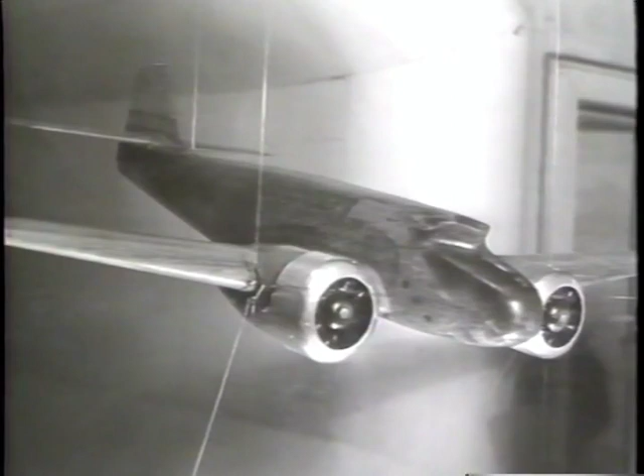In 1932, a small group led by Robert E. Gross had purchased Lockheed out of bankruptcy for $40,000 and staked the company's future on the development of an all-metal, twin-engine transport. Models of the design were sent to the University of Michigan, where a young graduate student named Clarence L. Johnson conducted wind tunnel tests.

Although his faculty advisors gave the design a passing grade, he wasn't much impressed, and after he had been hired on as a tool designer at Lockheed in August of 1933, he let Chief Design Engineer Hall Hibbard know about it. Among other things, it'd be directionally unstable, especially with one engine out. A rather presumptuous and certainly unconventional way for a 23-year-old to start his career with a new company, but it was only a hint of what would follow.

The son of Swedish immigrants, he'd been nicknamed Kelly by classmates because of his quick temper, stubborn tenacity, and unwillingness to back down from a fight, even against overwhelming odds. Instead of reminding the outspoken young man of his place, Hibbard suggested he go back to the wind tunnel and see if he could improve the design.

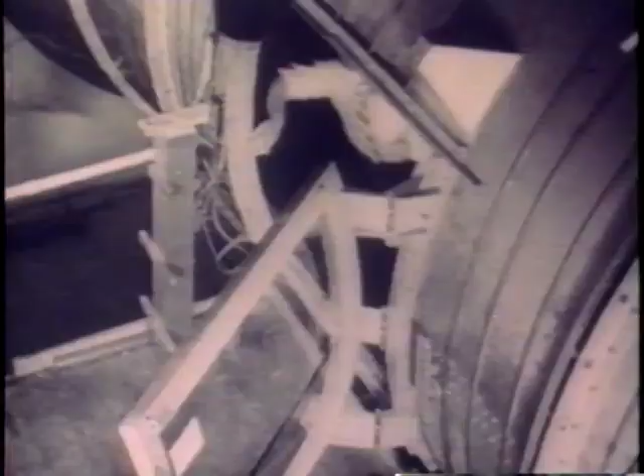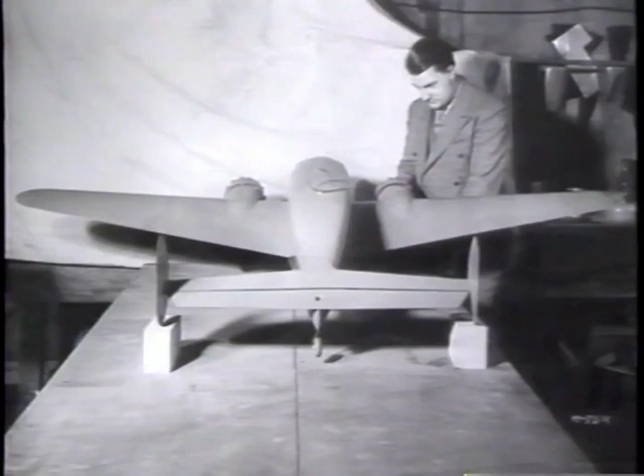After 72 test runs, he came up with the solution, an unconventional twin-tail arrangement soon to become a Lockheed trademark. And the Model 10 Electra became the foundation for Lockheed's future growth as various models of the airplane helped revolutionize commercial air transport in the 1930s.

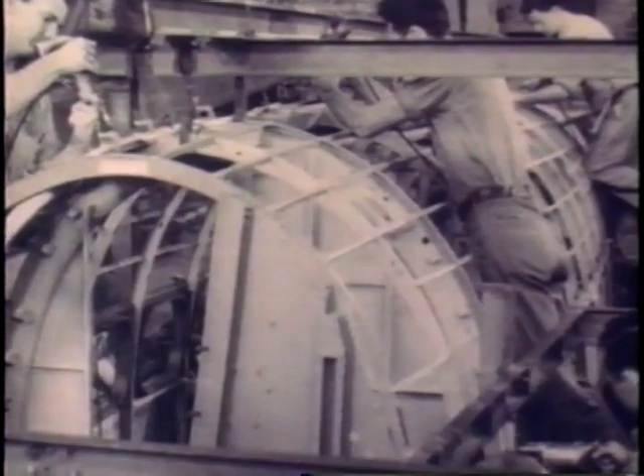With his work on the design, Kelly Johnson became the 6th member of an engineering department in an industry which then couldn't afford specialists. Working often simultaneously as an aerodynamicist, stress analyst, weight, wind tunnel, and flight test engineer, he also put in long hours out in the shop, getting hands-on production experience and learning firsthand the importance of designing producibility into an airplane. It was a real-world education on all phases of design and development that within a decade couldn't be duplicated, and the lessons learned became guideposts for the rest of his career.

He flew, for example, as flight test engineer on all models of the Electra and worked for some of the most notable figures in aviation, such as Amelia Earhart. Out of this experience came his lifelong conviction that the designer had to be able to test his own airplane. As he later commented, 'I decided at an early age that unless I had hell scared out of me once a year, I wouldn't have the proper balance to really design new airplanes of any type.'

Kelly Johnson would log more than 2,300 hours as a flight test engineer. The versatile Electra spawned 2 major developments.

One was the XC-35, a modified Model 10, which in 1937 first demonstrated the practical feasibility of transforming the entire fuselage into a pressurized cabin to permit comfortable high-altitude flight. Johnson was Lockheed's flight test engineer on this project, gaining first-hand experience with the problems of pressurization, and more important, with the tremendous possibilities pioneered by this aircraft. Possibilities to which he and Hall Hibbard began to give serious consideration.

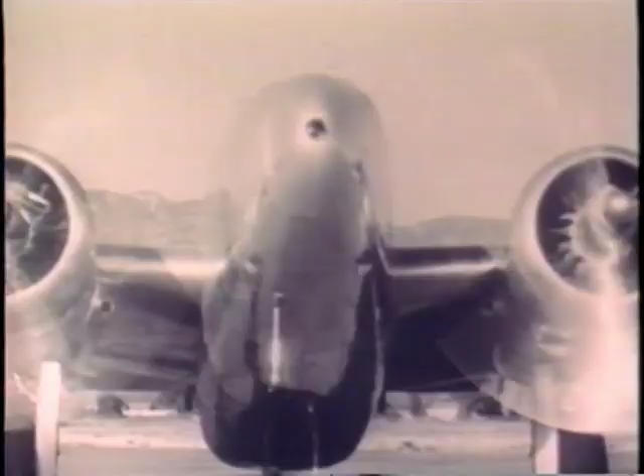Meanwhile, the Model 14 Electra incorporated a number of Johnson innovations, such as the first practical application of Fowler flaps, which both increased the wing's lifting surface and served to permit slower, shorter distance landings, an achievement which won him the 1937 Lawrence Sperry Award.

In 1938, the high speed and innovative features of the Model 14 attracted British interest in its potential as an anti-submarine patrol plane. But the requirements necessitated a major redesign. Johnson worked around the clock for 3 days, and transformed the Model 14 into the Hudson bomber.

The British ordered an initial batch of 250 aircraft, at that time the largest production order ever received by an American company. But there would be many more, 2,000 to the RAF alone, out of a total production run of nearly 3,000 airplanes. The Hudson put Lockheed into the big time.

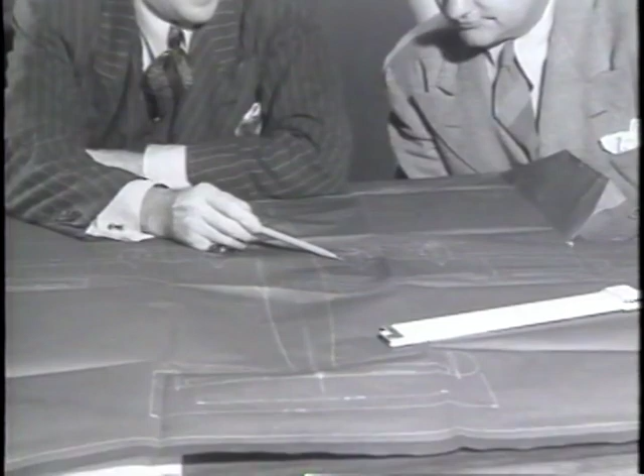But even as production was gearing up, Kelly Johnson and his colleagues were well into other much more ambitious designs. The success of the pressurized XC-35 and the recognition that the next generation of air transports would be much larger, higher-speed, transoceanic aircraft inspired Johnson, Hibbard, and a small design team to lay out the now classic lines of the Model 49 Constellation in 1939.

Using his soon-to-be legendary powers of persuasion, he convinced Lockheed to build its own wind tunnel, a decision that paid for itself many times over during the development of this design, as all aerodynamic problems were overcome early on and not one external change had to be made to the actual aircraft. Hibbard was so impressed by Johnson's wizardry that he swore he could see air.

Commercial development of the legendary Connie would be delayed by the war, and it first flew as the Army Air Force's C-69. This, however, provided time to refine the airplane so that at war's end, Lockheed was postured to capture a lion's share of the commercial market, and various models of the elegant Connie would continue to grace the world's airways into the late 1950s.

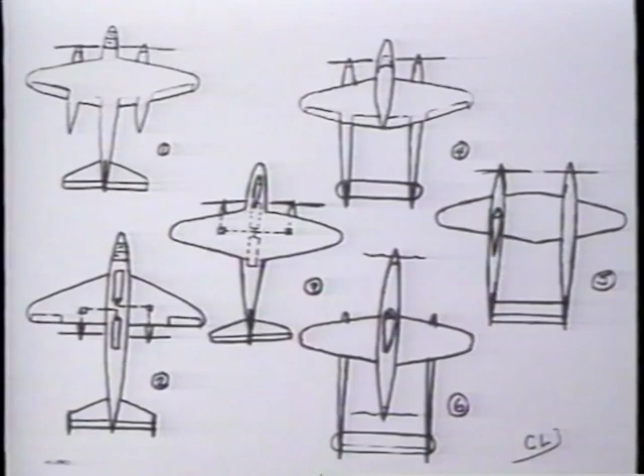At the time he laid down the basic design of the Constellation, Johnson was already well into another path-breaking project. In early 1937, responding to an Air Corps requirement for a high-altitude interceptor capable of 360 miles per hour, Johnson and Hibbard hastily conceived some possible configurations, depicted here in one of Kelly's rough sketches. As Johnson observed many times, in design, you're forced to develop unusual solutions to unusual problems.

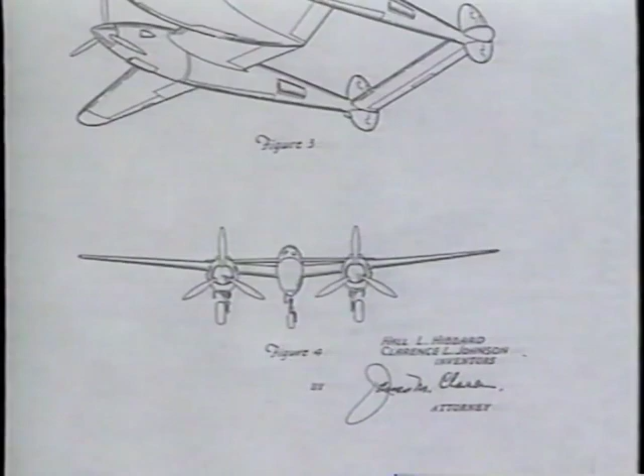Their decision to go with an unconventional twin-boom configuration was dictated by another axiom: design features are the creatures of necessity. The twin booms evolved as a logical development of engine nacelles which had to be extended to house the liquid-cooled engines, turbo superchargers, radiators, and main landing gear. It seemed logical then to simply extend the nacelles into booms which could carry the empennage. Their novel approach produced a winning design, and when the XP-38 was finally rolled out in January of 1939, its sleek lines bespoke speed.

And when Lieutenant Ben Kelsey took it up for its maiden flight, it delivered an impressive 403 miles per hour, far exceeding the requirements. Thus began the saga of the P-38 Lightning.

The first American aircraft able to fly at such speeds, it offered dazzling performance and a host of new problems. For as it peeled over into dives at high altitudes, it could hit speeds approaching 500 miles per hour. In this region, the aircraft began to violently shake and nose over into increasingly steeper angles, and control forces became so heavy pilots couldn't pull out.

Tragically, some never recovered. Kelly Johnson wasn't taken by surprise. Although many insisted it was tail flutter, he immediately recognized it as the then little understood phenomenon of compressibility. At 500 miles per hour, localized airflow over certain parts of the aircraft was reaching supersonic velocity, and this produced shock waves and serious problems.

The P-38 was the first aircraft to encounter this, and so little was actually known about it that Johnson launched exhaustive wind tunnel studies and an accelerated dive test program headed by Chief Test Pilot Milo Burcham. After more than 2 years, he finally identified the problem as shock stall on the wing, which reduced lift and increased drag, thereby inducing the nose-down tuck.

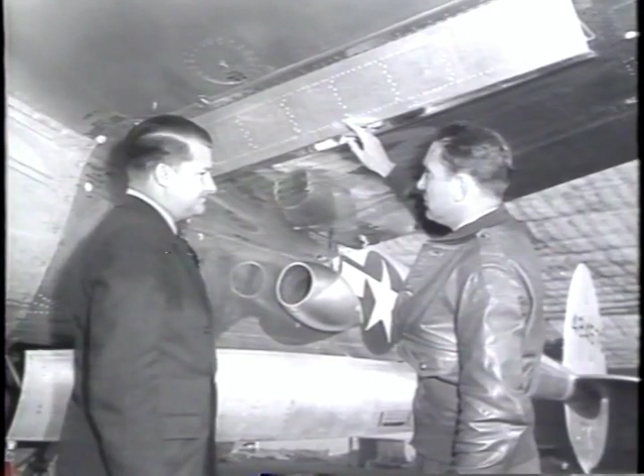Typically, he was quick to devise a cleverly simple remedy, a dive flap mounted to the main wing spar that, when deployed, generated a positive pressure field, immediately restoring lift and a nose-up pitching moment.

Flown on every battlefront, the P-38 excelled in combat. Christened the fork-tailed devil by Germans, the versatile fighter, combining speed and load-carrying capability, proved adaptable to a wide array of combat roles, and its long legs made it ideal for the vast reaches of the Pacific, where it destroyed more enemy aircraft than any other Allied fighter.

Impressive though it was, Kelly Johnson was never satisfied with it. He'd long foreseen the inherent limitations of prop-driven aircraft, and though unaware of developments in Germany and England, where turbojets had already been successfully developed, he decided that props had to go.

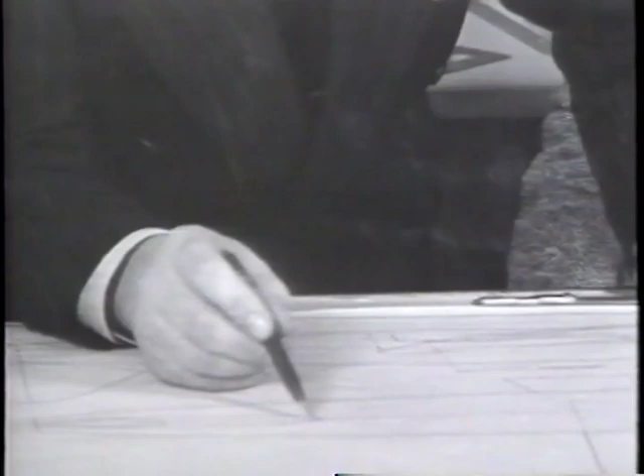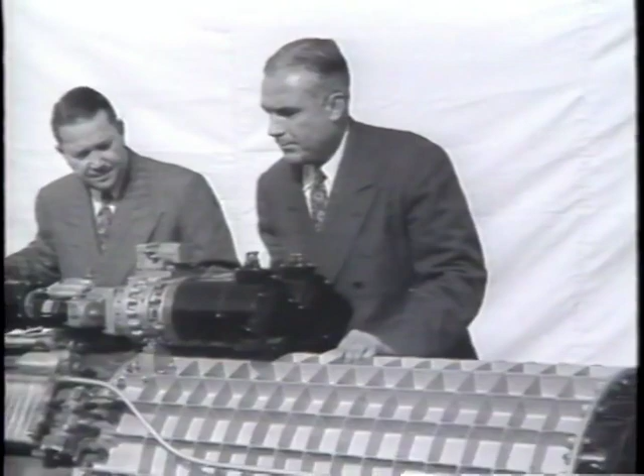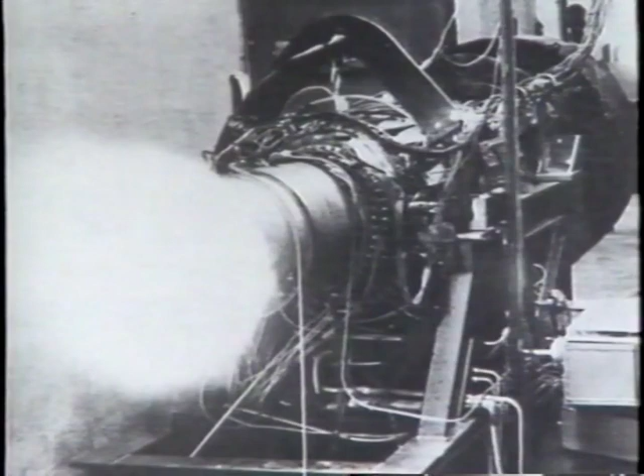Thus he and Hibbard became the first in this country to seriously pursue the possibilities of turbojet propulsion, when in 1939 they asked Nathan Price to design an experimental turbojet power plant. Design of the L-1000 got underway in 1940, and by 1942, Price had come up with a truly advanced design, a high compression ratio, twin spool, axial flow power plant promising an extraordinary 5,100 pounds of thrust.

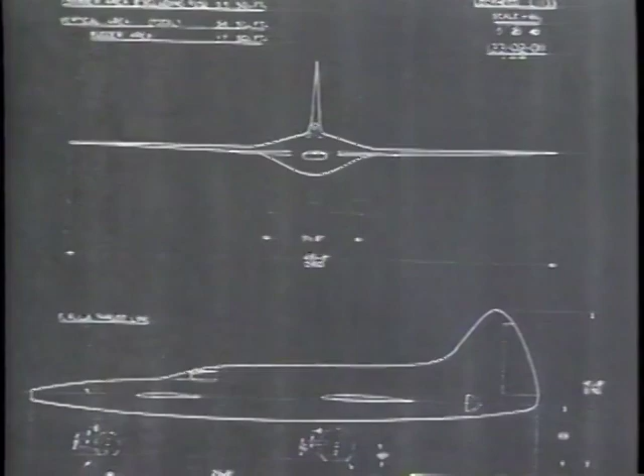Meanwhile, Johnson and a young engineer named Willis Hawkins led a design team that came up with the L-133, a truly radical twin-engine stainless steel aircraft featuring thin wings and canard surfaces and projected to achieve 625 miles per hour at 50,000 feet. But surprisingly, when Johnson submitted a proposal for development of the engine and airframe in March 1942, the Army Air Forces showed little interest.

Although launched long after his effort, top-secret development of an American turbojet fighter powered by a British Whittle engine was by then already underway. The Bell XP-59A first flew at Muroc Army Air Force Base on California's high desert in October of 1942, but it proved to be underpowered, overweight, and scarcely optimized for jet flight. Early on, the Army Air Forces decided that it wouldn't meet frontline fighter requirements, though Bell didn't yet know this, and the testing continued.

On June 10, 1943, a Bell engineer at Muroc reported back that Johnson had been permitted to examine the still top-secret XP-59A, and he wondered what he was up to. Unbeknownst to Bell, the Army Air Force had already asked Lockheed to submit a proposal for a simpler, single-engine jet fighter built around a 3,000-pound thrust Halford H-1 engine, capable of frontline service. Johnson took in a lot that day, but he'd already been wrestling with jet propulsion for nearly 3 years, and he already had a suitable design well in hand.

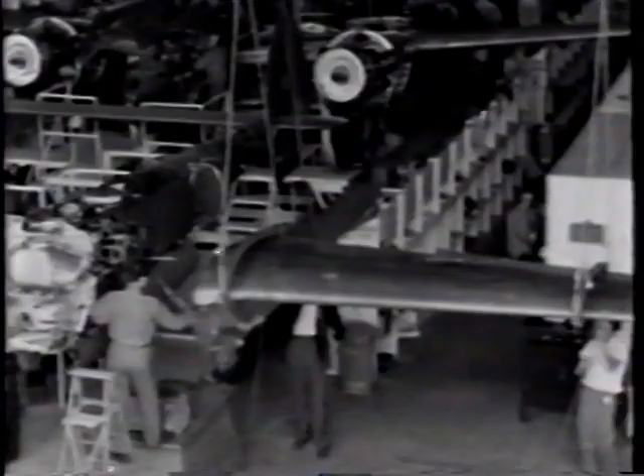When he made his proposal at Wright Field on June 18th, he made the astounding promise that he'd deliver an aircraft within just 180 days. Getting immediate approval, he was cautioned that the utmost secrecy was required. Lockheed was already swamped in terms of manpower, tooling, and facilities with wartime contracts.

But this was a blessing in disguise, an opportunity to implement an idea he'd been pestering Robert Gross about for years: let him round up a small group of talented people, designers, engineers, and shopmen, put them under one roof where they could all work closely together, and give him complete authority over everything from procurement to flight test. With no other options, Gross said, 'Go ahead.' Stealing people from around the plant, just 28 engineers, including himself, and 105 shopmen, he also built a small facility out of discarded shipping crates, using a circus tent for a roof.

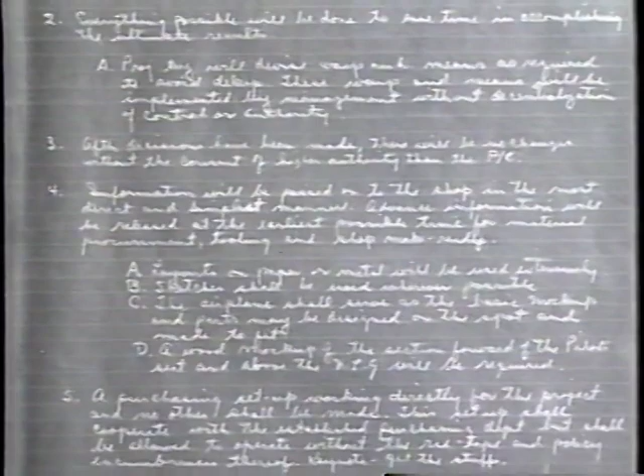On June 19th, he laid down the principles under which the project would operate. In 1.5 pages, now preserved on old photostats, they formed the basis for how he'd try to operate for the next 30 years. He'd be responsible for all decisions. Paperwork and red tape would be cut to the minimum. Each engineer would be designer, shop contact, parts chaser, and mechanic, and each would remain within a stone's throw of the shop at all times. There'd be but one object: to get a good airplane built on time.

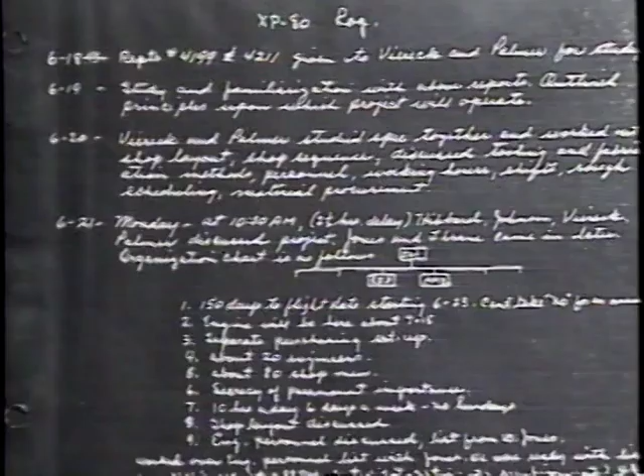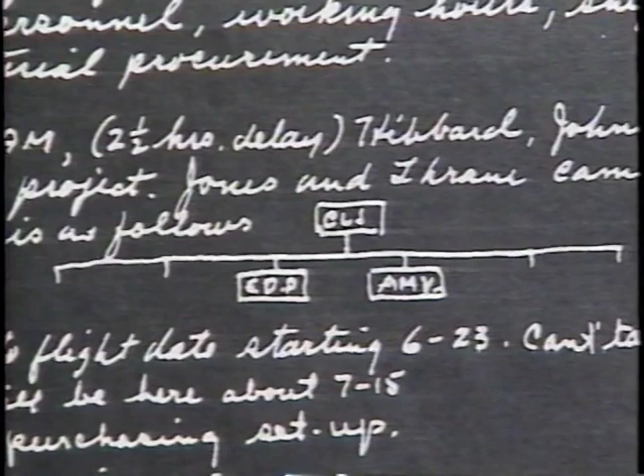The daily log indicates that 2 days later, he laid out the horizontal structure of the organization. No pyramidal, multi-tiered layers of management. Each project engineer and the shop foreman would report directly to him, and in fact, he'd be looking over everyone's shoulder. He wanted information direct from the men doing the work, and if they had questions, they'd get decisions immediately on the spot.

He'd promised the airplane in 180 days. As would become his custom, he gave his men 150. The clock started ticking on June 23rd. Forcefully reminded that simplicity is the keynote of good design, the designers jumped into their work. But this was a new kind of operation, and instead of moving from stage to stage, the schedule demanded an extraordinary degree of concurrency.

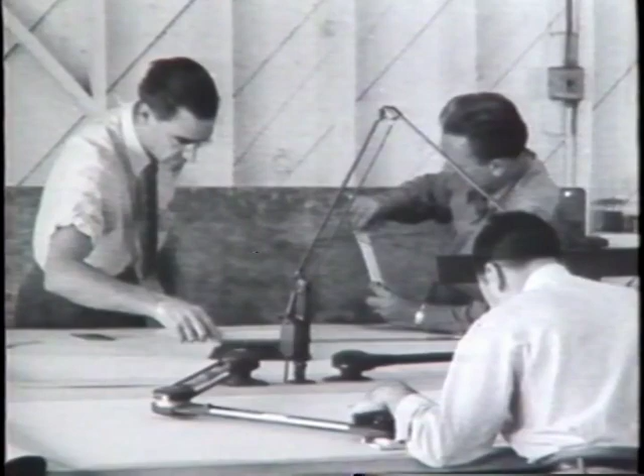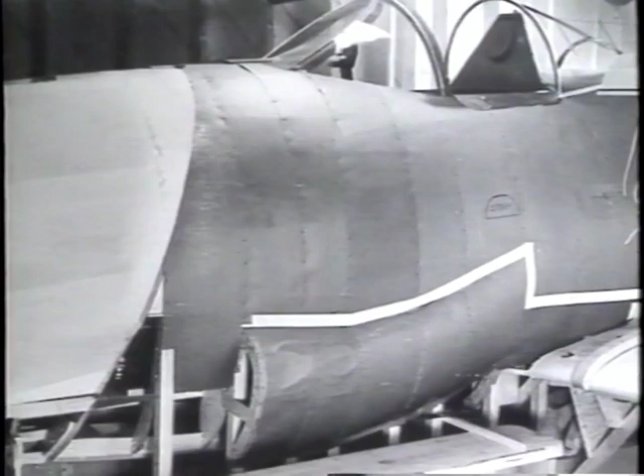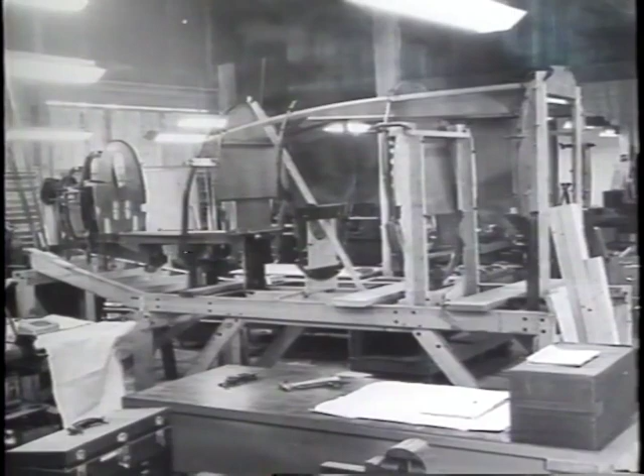With finished detailed design still many weeks away, the mock-up was started on June 30th and completed by July 17th. By then, milling and fabrication of parts and the construction of jigs to assemble a prototype was already well underway, and by July 31st, the bulkheads were going into the jigs. Section by section, the airframe started coming together.

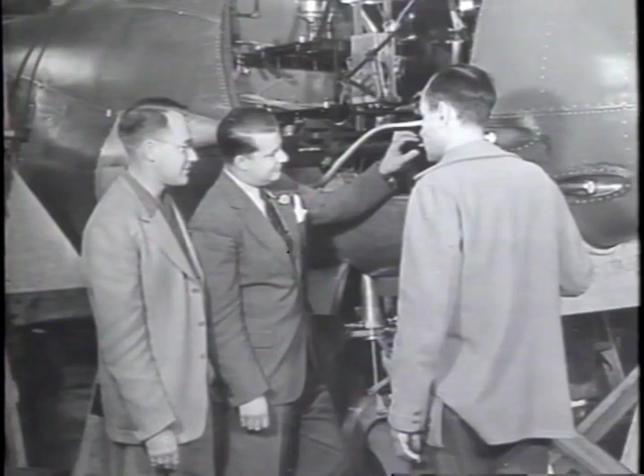Throughout this period, however, the design process continued. As concurrent wind tunnel tests revealed problems, the wing and the engine air inlets were the biggest headaches. He'd gambled on the wing, a laminar flow airfoil that had never before been tested on an airplane, and of course, nobody had had any experience with inlets. Johnson was willing to accept mistakes on such an accelerated and risky venture, as long as they were reported promptly. Typically, he never asked why, but what are you going to do to fix it?

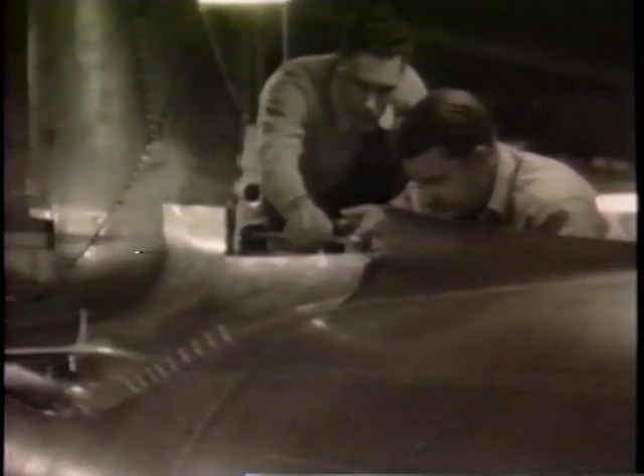The project was so secret that his group didn't even have a name. The whole setup reminded one of his design engineers, Irv Culver, of the mysterious place where Hairless Joe, one of Al Capp's cartoon characters in Li'l Abner, ground up skunks, old shoes, and other unsavory ingredients to brew a potent concoction called Kickapoo Joy Juice. So inspired, he answered the phone one day, 'Skunk Works, Inside Man Culver.' And though Johnson wasn't amused, his organization suddenly had a name that stuck.

Remarkably, the completed aircraft arrived at Muroc on November 14th, just 143 days after startup. But when the engine was run up 3 days later, there was a terrific roar as the inlet ducts collapsed, sending debris into the engine and cracking the impeller. It took 6 weeks to get a new engine, but on January 3rd, 1944, Milo Burcham successfully completed the taxi tests.

Five days later, in the chill of the morning on January 8th, Johnson, in white coveralls, overcoat, and stocking cap, worked intently with his crew preparing for the first flight, as over 100 Skunk Works employees stood atop a hill looking on. He wanted everyone who'd worked on the airplane they now called Lulu Belle to be on hand.

He told Burcham, "Just fly her, Milo, and find out if she's a lady or a witch." At 9:15, he took off.

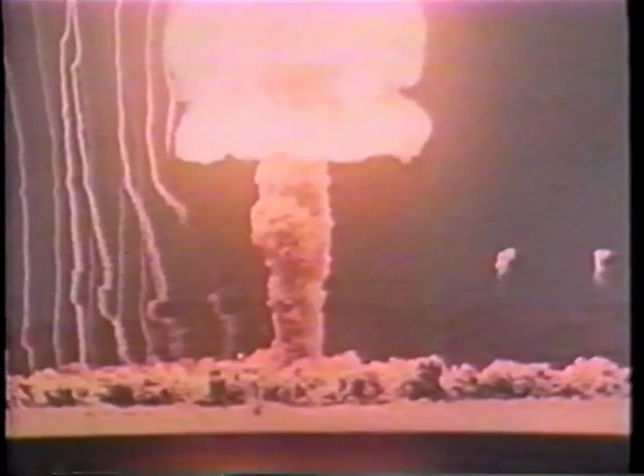As in April of 1952, it survived the first of a series of atomic blasts, suffering only 20 hours worth of repair work.

Meanwhile, Johnson was completing work on a much more unconventional airplane. Designed to meet a Navy requirement for a vertical takeoff and landing, or VTOL fighter, the XF-V1 was supposed to claw its way straight up by means of huge contra-rotating props driven by a twin turbine power plant, providing more power than the airplane's weight.

Engine development lagged, however, and after test pilot Herman Fish Salmon first lifted off from the lake bed at what was now called Edwards Air Force Base in December 1953, the underpowered XF-V1 continued to rely on its makeshift landing gear for all takeoffs and landings.

Once aloft, however, Salmon was able to demonstrate that it could make satisfactory transitions from horizontal to vertical flight, and that it could hover in the vertical attitude.

But lacking the promised power, and explaining in his words that it's awful hard to fly an airplane looking over your shoulder, Salmon wasn't eager to attempt vertical liftoffs or touchdowns. Neither was Johnson, who, believing a designer shouldn't be afraid to fly his own airplane, had the integrity to recommend cancellation of the whole project.

By that time, however, he already had a much more promising design on the ramp at Edwards. When Tony LeVier first saw it, he asked incredulously where the wings were. But those tiny, blade-thin wings and everything else about the XF-104 were actually the product of years of careful thought, effort, and Johnson's determination this time to employ his skunkworks methods.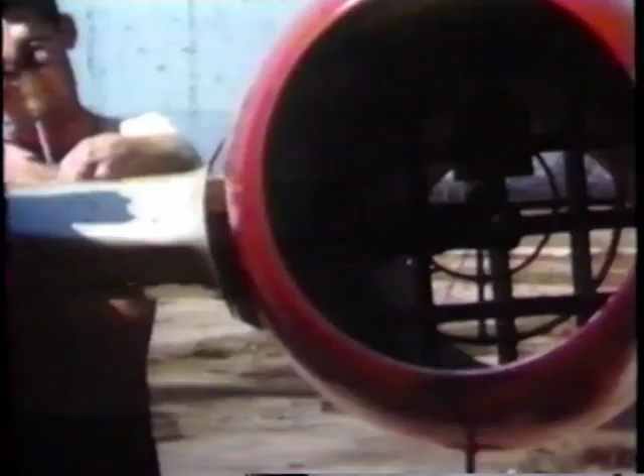Back in 1947, he'd modified a P-80 with wingtip-mounted ramjets, and with Fish Salmon at the controls, it became the first piloted aircraft to fly on ramjet power alone. These tests supported a major skunkworks type of effort to explore a whole new realm.

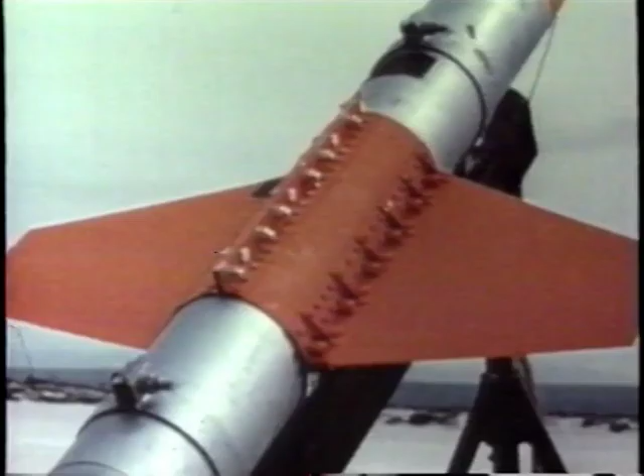At a time when missile and guidance system technologies were still in their infancy, Johnson's team had to design a pilotless Mach 3 testbed to further explore ramjet technology. The X-7 was the product of their efforts, and its tiny, thin, slightly tapered wings, Johnson's solution to the problems of high Mach flight, had been thoroughly tested on rockets and with scale models.

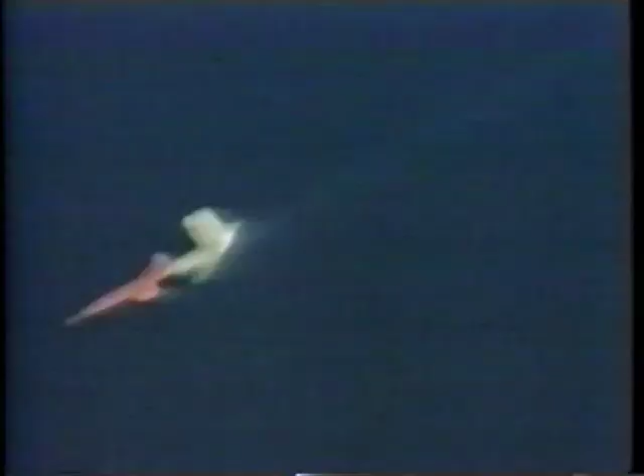The X-7 first flew in April 1951 and went on to a remarkable career. Launched from a B-29, boosted to high speed by powerful rockets, and then flying on various ramjets under test, it ultimately exceeded Mach 4 and climbed well above 100,000 feet.

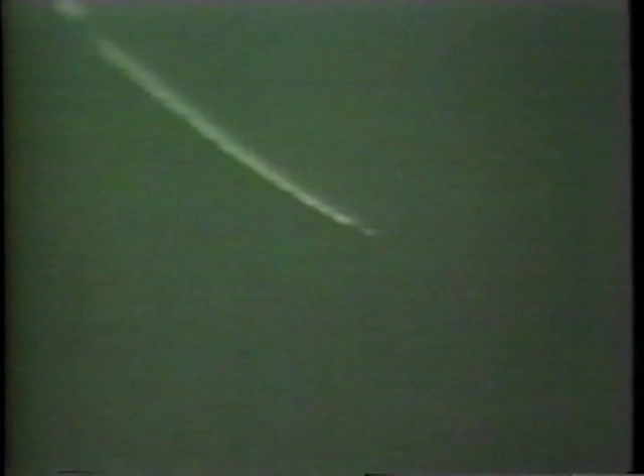Thus those small, thin wings were already more than just a theory when Johnson visited the Korean battlefront in 1951. Still smarting from the XF-90, he'd gone there to talk to the ultimate customers, combat pilots, about what they wanted in a fighter. To a man, it was higher speed, more altitude, and less complexity.

Intent on giving them just that, he made an unsolicited proposal to build a fighter for which no requirement yet existed. When he promised Mach 2 at 60,000 feet in a simple, lightweight fighter, Colonel Bruce Holloway stepped into the next room and within 2 hours returned with a short 1.5-page list of requirements.

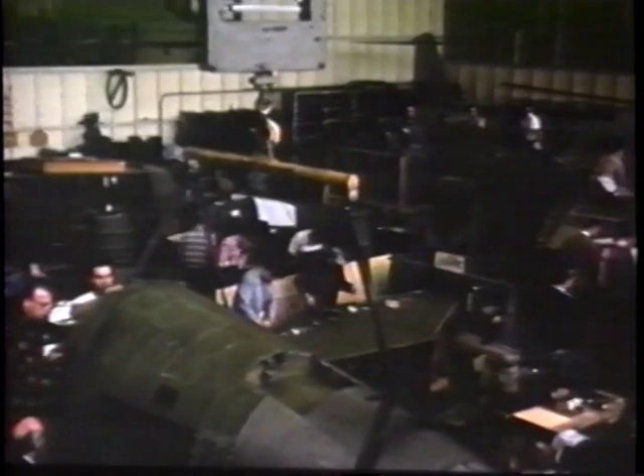This time, with a firm, straightforward requirement, Johnson returned to his favorite skunkworks mode of operation, and less than a year later, in February of 1954, Tony LeVier lifted the XF-104 from the lake bed for its first flight.

Though configured with a much lower thrust engine than the powerful J-79 scheduled for the production model, the XF-104 was still faster than any other fighter in the world.

But Johnson had produced more than just a dazzling performer. Fanatical about costs and producibility, while design of the prototypes was still underway, he'd set up a small group of engineers to find the cheapest and most efficient way to produce each part of the production airplane, an innovation which would result in savings of about $12,000 per aircraft and millions for his customers.

When the press finally got to see the F-104, they called it the missile with a man in it, and they weren't far off the mark. The first Mach 2 operational aircraft in the world, it would go on to shatter every significant record on the books: 91,000 feet and 1,400 miles per hour in May of 1958, making it the first aircraft ever to hold both the world altitude and speed marks simultaneously.

Three time-to-climb records later that year. And in 1959, it became the first airplane taking off on its own power ever to climb above 100,000 feet, as Captain Joe Jordan zoomed up over 103,000 feet. This kind of performance clinched the 1958 Collier Trophy for Johnson.

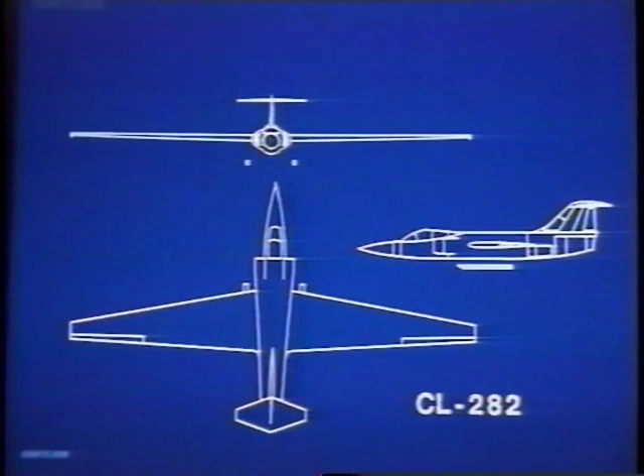The decision to proceed with overflights led to a design competition for a reconnaissance aircraft capable of 70,000 feet. Though Lockheed hadn't been invited to participate, Johnson had caught wind of it and hastily submitted a proposal to build the CL-282, essentially a modified F-104 with a wide-span, high-aspect ratio wing. Though it lost out to the Bell X-16, Kelly Johnson wasn't about to quit.

Over the years, he'd gotten to know a lot of people in high places, and he developed consummate lobbying skills. With a revised design and promising an airplane within just 8 months, he got the go-ahead to produce 20 aircraft for $22 million.

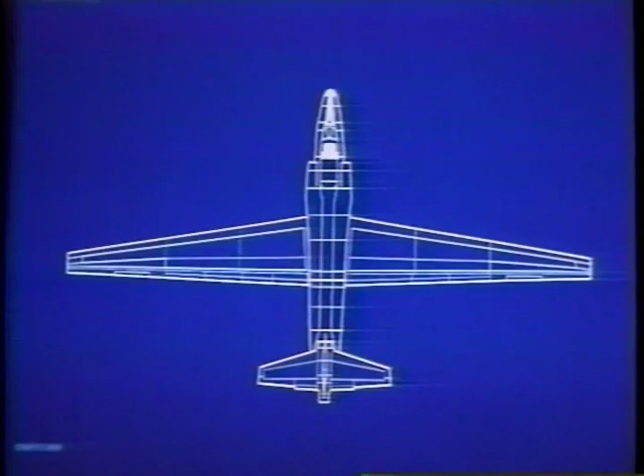The project, codenamed Aquatone, was directed by the CIA's Richard Bissell, who found the Skunk Works' streamlined, informal method of getting things done much to his liking. Secrecy limited access to a mere handful of CIA and Air Force personnel, which was fine with Johnson because it freed him from a lot of needless paperwork and interference.

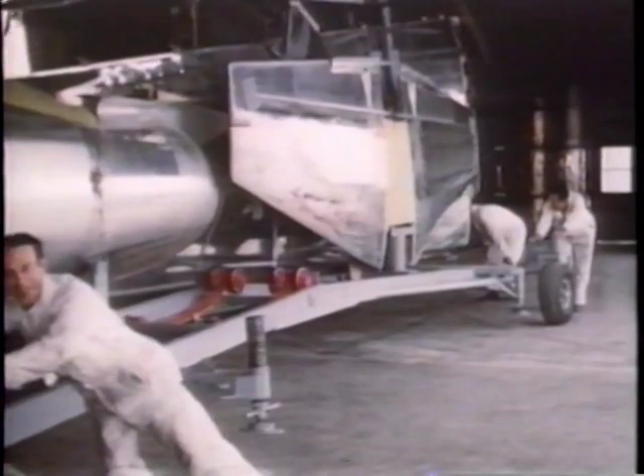The urgency of the project also freed him from what he regarded as the tyranny of technical specifications. His customers simply wanted an airplane that could do the job, and all he had to do was deliver on time. While the article, as it was called, was a relatively conventional design, the extreme altitudes at which it was supposed to operate imposed severe demands.

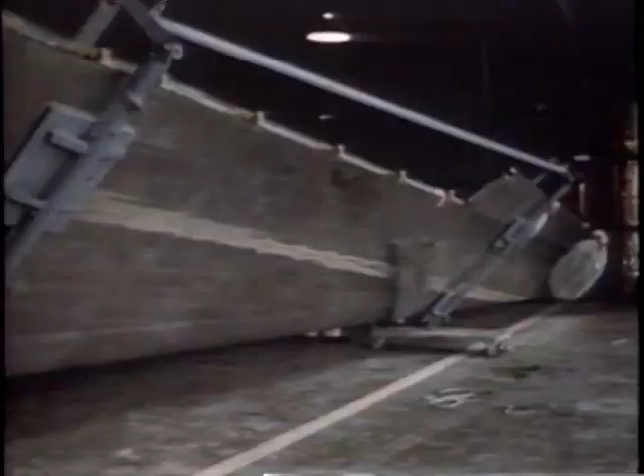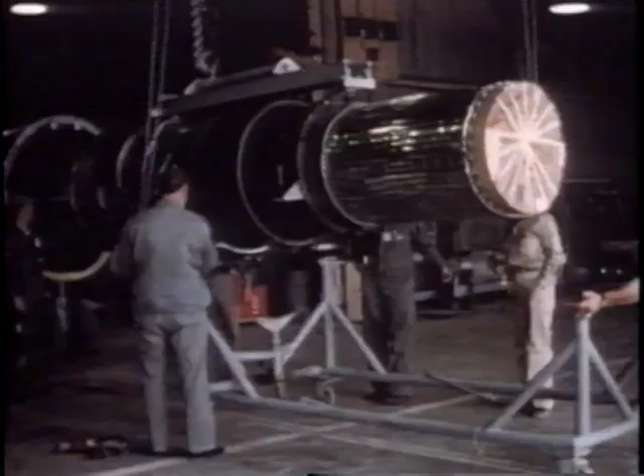Forced to ruthlessly cut weight, he reduced structural components to the minimum and designed delicate, glider-like wings spanning 80 feet and weighing less than 4 pounds per square foot. The fragile airframe was designed around a special high-altitude version of the J-57 engine, virtually hand-built to extremely high tolerances and originally producing 10,500 pounds of thrust.

When the disassembled aircraft was unloaded from a C-124 at a remote desert test site in July of 1955, Johnson had met yet another seemingly impossible deadline. After reassembly, it was rolled out into daylight for the first time and painstakingly prepared for its taxi tests.

On August 1st, as he had so many times in the past, Tony LeVier climbed into the cockpit. During his third run that day, he suddenly noticed that he was more than 30 feet off the ground.

Coming down hard, the tires blew and the brakes failed and caught fire. Reporting afterwards, he explained that at 70 knots, I became aware of being airborne, which left me with utter amazement, as I had no intentions whatsoever of flying. Those fragile wings had more than enough lift.

He completed the first real flight 4 days later, and on a subsequent flight reported that the aircraft climbed toward the heavens like a homesick angel.

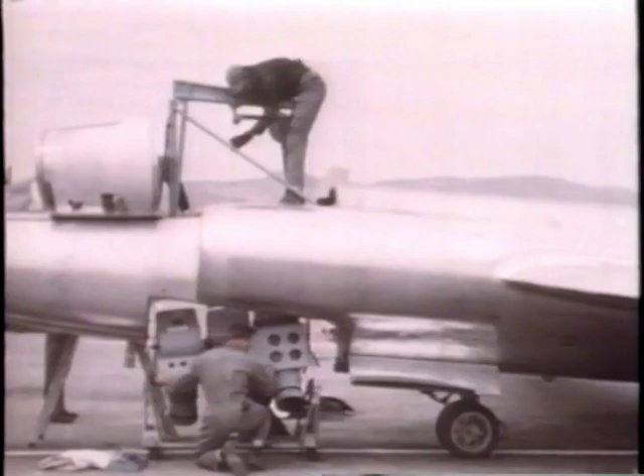To conceal its true purpose, the Angel was given the misleading official designation U-2, and a cover story was released to the effect that it was being developed as a high-altitude research vehicle for the National Advisory Committee for Aeronautics. While it would perform this role admirably, tests focused on preparing the U-2 for its real mission, to carry 700 pounds of high-resolution camera equipment up to altitudes then beyond any air defense capabilities.

In July 1956, just 11 months after first flight, it commenced its clandestine operational career. Climbing to well above 70,000 feet as fuel burned off, the U-2 successfully completed flights over denied areas and brought back the first hard data on the status of Soviet military preparedness and the true extent of its intercontinental ballistic missile program.

Called the Dragon Lady by its pilots because it reminded them of the beautiful, mysterious, and sometimes treacherous character in the Terry and the Pirates cartoon strip, it flew with virtual impunity for 4 years until that day in May of 1960 when Francis Gary Powers was shot down by a surface-to-air missile.

While deep penetration of Soviet airspace came to a halt, the U-2 continued to overfly hotspots around the world, such as in 1962, when it confirmed the existence of missile launch sites in Cuba. And it would also continue to perform an incredibly wide array of extremely high-altitude research missions.

Kelly Johnson had reason to be proud of his Angel. The Skunk Works had finally been formally established as Lockheed Advanced Development Projects, and on this, its first production program, he'd refunded $2 million from the original $22 million contract and built an additional 5 airplanes out of spare parts. Surely one of the best bargains in defense procurement history.

That pride was rekindled when in 1981, the larger, more sophisticated TR-1 was rolled out years after U-2 production had ended. It was the first time the Air Force had ever put an aircraft back into production. And it remains to this day the highest flying single-engine piloted aircraft in the world.

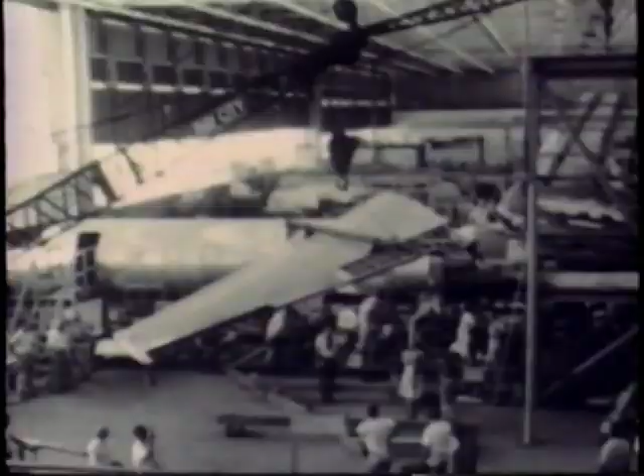Back in December of 1956, the Skunk Works' remarkable performance on the U-2 had convinced Lockheed to give Johnson the job of designing and developing prototypes for a small military jet transport. Dollars were scarce, competition keen, and he'd only have 8 months to do the job. Being on time had always been one of his cardinal rules, and in just 241 days, he delivered the Jetstar.

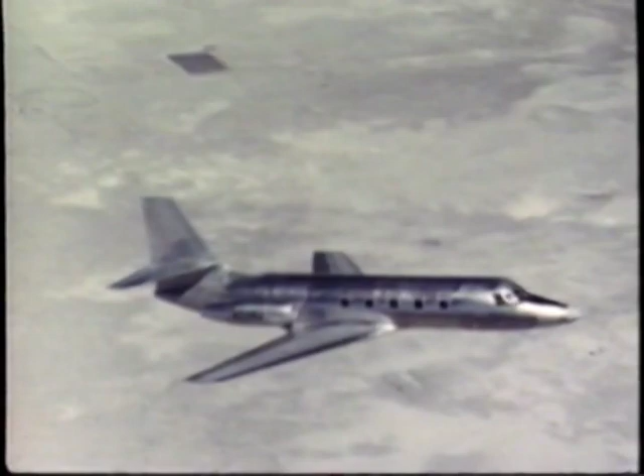He'd actually been working on designs for a large jet transport since 1944. This trim little craft was actually a scaled-down version of the L-193, an innovative 1953 design which the airlines had feared too risky to support. Johnson, who continued to put in long hours as a flight test engineer on this project, was out to prove them wrong. And he was more than pleased with the results.

A top speed of over 600 miles per hour, a peak altitude of 52,000 feet, and with wing tanks, a range of over 3,000 miles. The Jetstar easily won the competition, and though only a limited number went into military service as C-140s, ultimately more than 200 were produced, and a great many of them remain in service to this day.

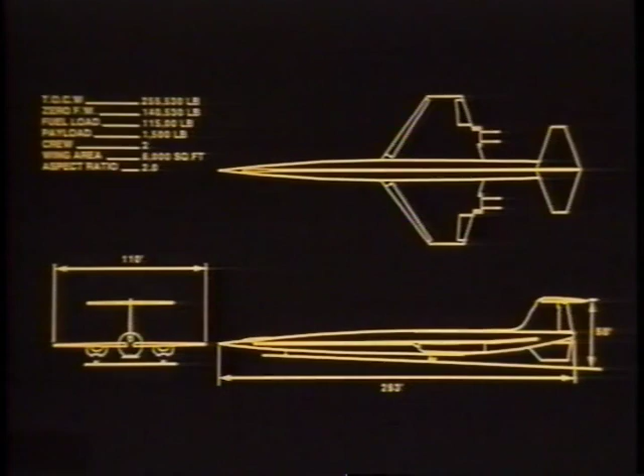The Jetstar was a pleasant diversion as he worked on another, much tougher project. Even as development of the U-2 was still underway, he'd projected that air defenses would catch up with it within 2 years. And he'd initiated a remarkable series of design studies for a liquid hydrogen-fueled supersonic successor capable of climbing above 90,000 feet. Performance varied from Mach 2.5 and a range of 2,200 miles to Mach 4 and 9,000 miles.

Because of the extremely low volumetric density of liquid hydrogen, however, the latter speed and range capability could only be achieved by building an airframe twice the size of a B-52. That was far too costly.

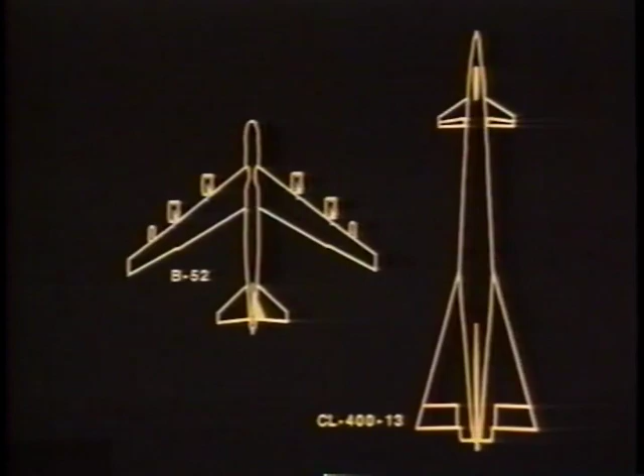And thus a much smaller design at the lower end of the performance spectrum went into development as the CL-400 in 1956. Though the CL-400 proved the technical feasibility of a liquid hydrogen-powered aircraft, Johnson was dissatisfied with its short range and convinced that the problems of producing and transporting fuel around the world were insurmountable. Refusing to build an airplane he didn't believe in, he recommended cancellation of the project in 1957.

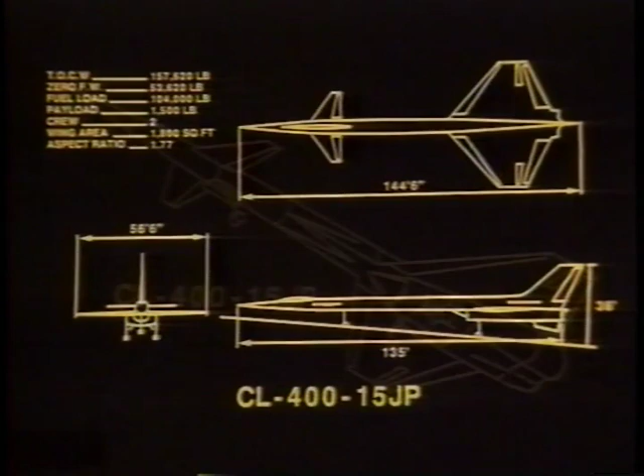But he had an ace up his sleeve. Concurrent with the liquid hydrogen studies, he'd also examined the potential of another advanced design using jet fuel, which at some loss in altitude promised Mach 3 cruise and 4,000-mile range. It was the genesis of his most spectacular creation.

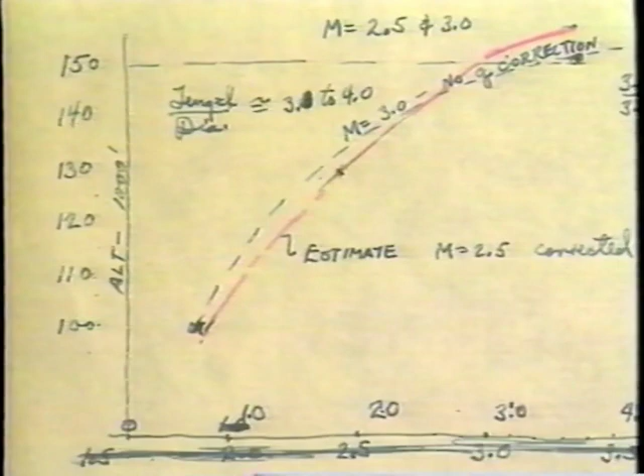Given approval to proceed, in April of 1958, Johnson began a series of design studies, unveiled publicly here for the first time, for what he initially called the U-3, and then the Archangel, because it would soar much higher than the U-2. He explored various means by which he could get the vehicle to altitudes as high as 150,000 feet, employing a variety, or even a combination of rocket, ramjet, and turbojet power plants.

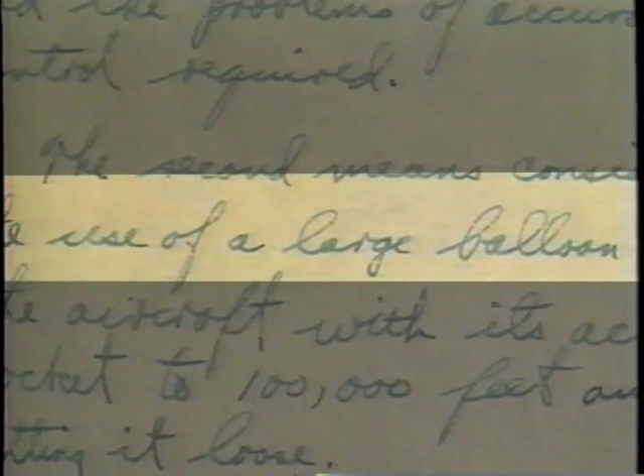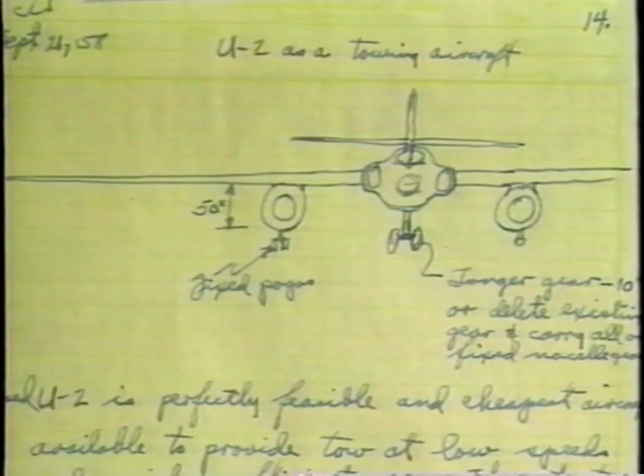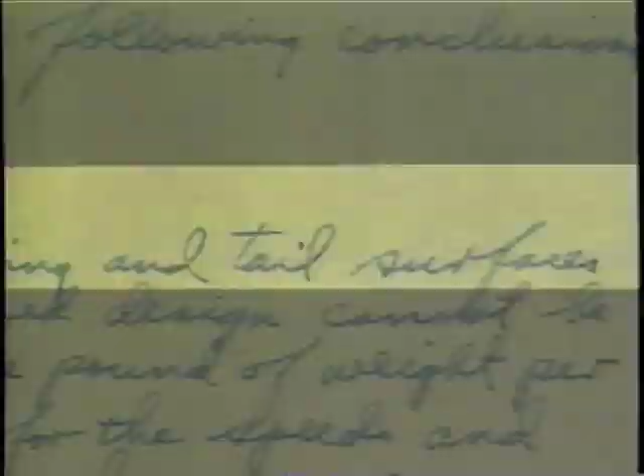At one point, he looked at the use of balloons to lift it to its rocket boost phase, and then at using a modified U-2 to tow a ramjet vehicle to 60,000 feet for engine ignition. He even considered a multi-staged vehicle, and one with inflatable wings and empennage. And throughout, he was challenged by the urgent need to reduce radar cross-section. For the first time, stealth would have to be designed into the airplane.

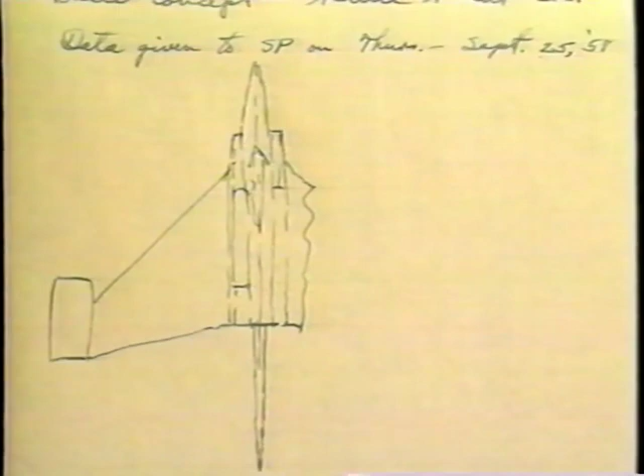The intense design gestation process was completed in just 16 months, and when he presented his 12th concept to the CIA and Air Force in August 1959, he got the go-ahead.

When the stunningly beautiful A-12 was finally rolled out for its initial tests in April 1962, it wasn't some fantastic multi-staged aberration. It was an honest airplane, but nothing like it had ever been built before. Ironically codenamed Oxcart and designed for sustained Mach 3.2 cruise at altitudes between 75 and 95,000 feet, it posed by far the greatest challenge of Johnson's career.

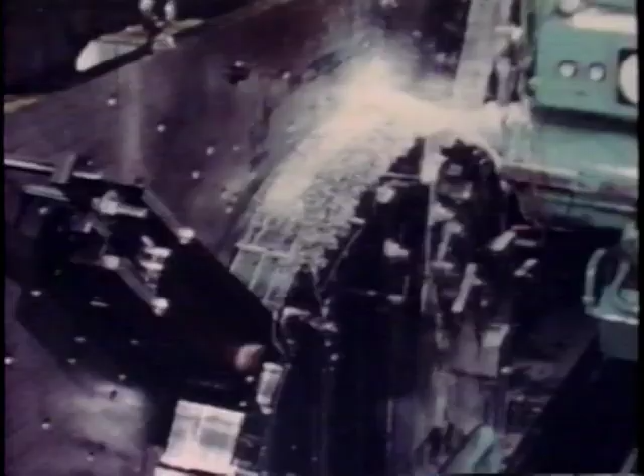Everything from structural materials to hydraulic fluid and fuels had to be invented from scratch. Because of the intense heat at sustained Mach 3 speeds, averaging more than 550 degrees on the surface of the airplane, Johnson employed a titanium alloy for more than 90% of the airframe. But no one had ever before attempted to process such quantities of the extremely hard metal to the purity and strength levels required.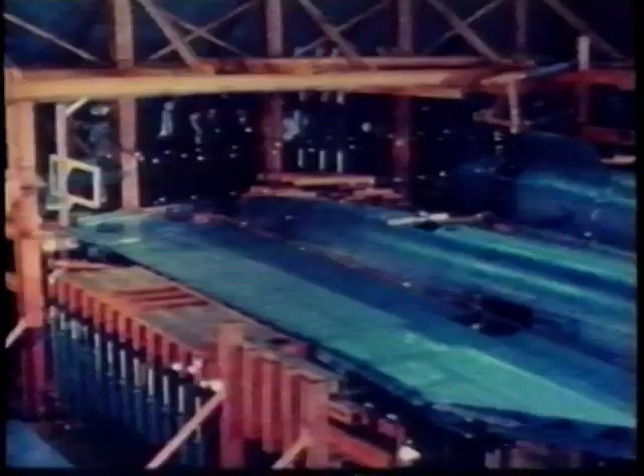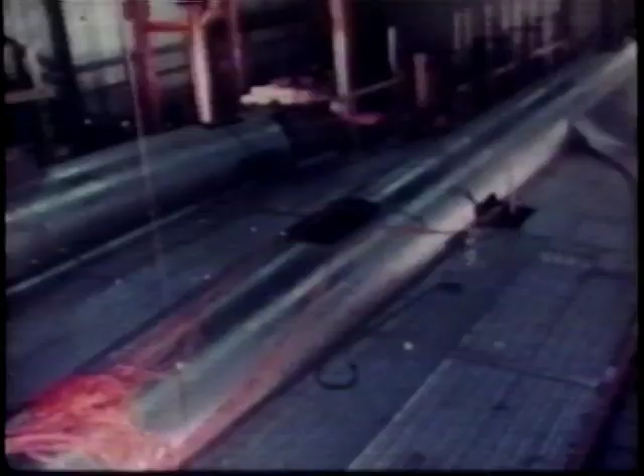And thus new forging and milling processes had to be invented and perfected. When the thin titanium skin on a wing panel shriveled up during heating tests, Johnson separated the panels from the wing spars with extrusions and put the now famous corrugations in the skin. When heated thereafter, the corrugations merely deepened a few thousandths of an inch and on cooling returned to their original shape, a common-sense solution to a difficult problem.

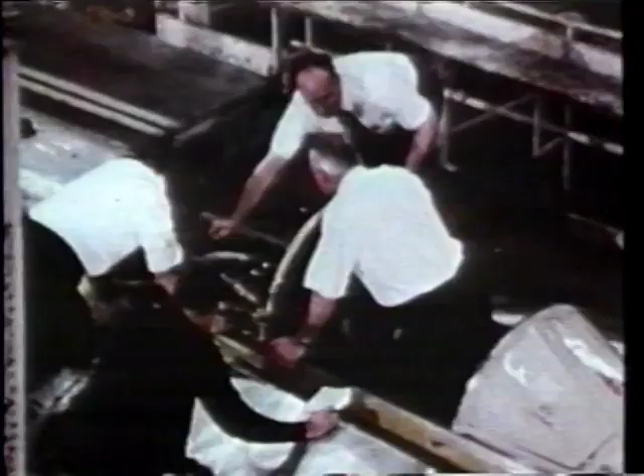There were literally thousands of such problems to overcome, and as always, Johnson stayed on top of all of them, looking over people's shoulders and asking lots of questions, always the best way, in his view, to get people to solve problems. He continued to amaze everyone with on-the-spot predictions of skin temperatures, which after hours of calculation, they'd find were within 1 or 2 degrees of the exact figure.

The whole effort, completed in absolute secrecy, with an incredibly small group of people, was all the more remarkable because it was done without the benefit of computers. As Johnson later recalled, when you think back to 1958, when the basic design work on the prototypes for this airplane was being designed and built, we had to make use of the Michigan computer, which is a 12-inch slide rule, and it did its job quite well.

All of this prodigious effort was about to come to fruition when on April 25, 1962, preparations for high-speed taxi and an initial brief liftoff were completed. But as Lou Schalk sped down the runway, he encountered nose-wheel steering problems and had to kick in heavy right rudder. Then, as Johnson wrote in his log, the aircraft got off the ground and there was an immediate change of rudder angle. This set up lateral oscillations which were horrible to see. Schalk was lucky to get the airplane back on the ground. The problem was fixed post-haste, and the next day he completed the first unofficial flight with the gear down.

On April 30th, Johnson was back with an entourage of VIPs for the official first flight. Looking like he didn't have a care in the world, he offered a few last words of encouragement and advice before Schalk taxied out. And from there, everything went flawlessly.

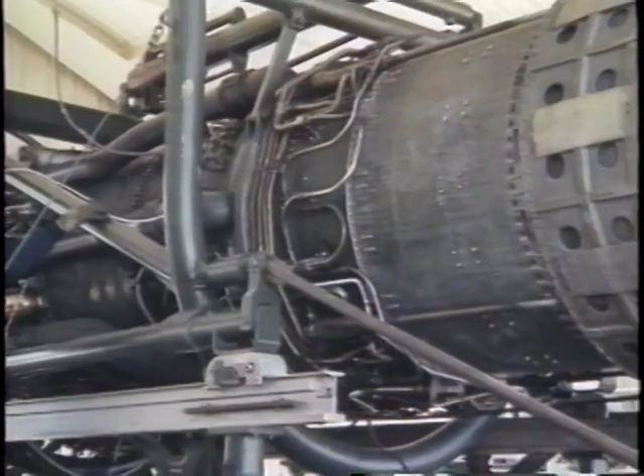Limited by interim J-75 engines, the A-12 didn't begin to realize its full potential until after the Pratt & Whitney J-58s for which it was designed finally arrived in January 1963. At 32,500 pounds of thrust, the J-58 was every bit as exotic as the airplane itself. In combination with an extremely complex inlet and exhaust ejector system, it operated as a normal afterburning turbojet up to speeds of about 1,600 miles per hour, and then shifted to bleed bypass cycle, with the inlet actually providing most of the thrust at Mach 3 cruise.

When a two-seat trainer became available in early 1963, Johnson, true to his convictions about flying his own aircraft, jumped into the rear cockpit. And, taking control after climb-out, he'd fly supersonic for the first time in his life.

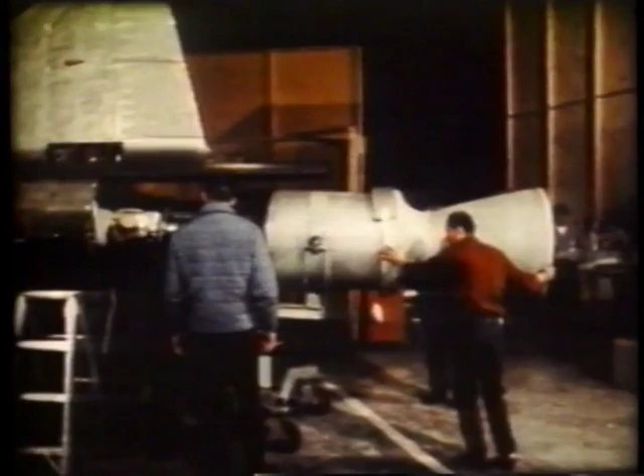During the course of the test program, a pair of airframes were modified for a highly unconventional mission. In 1964, the Skunk Works built a small, 42-foot-long airframe with the very same materials used on the A-12. Designed to overfly areas deemed too risky for air crews, the D-21 drone would ride piggyback atop an A-12 for Mach 3 launches at 80,000 feet. And powered by a ramjet originally developed during the X-7 program, it would be even faster than the A-12.

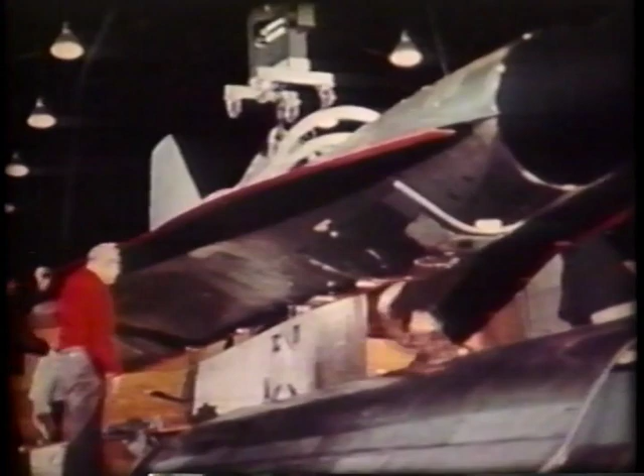The finished article was mounted to its mothership, now designated M-21, in December 1964. And on December 22nd, the unusual pair taxied for the first time, and flight tests got underway. After takeoff on launch missions, the M-21 climbed to a rendezvous with a KC-135 for refueling, and then proceeded on to the predetermined launch point, where the backseater would monitor the systems and initiate the launch procedures.

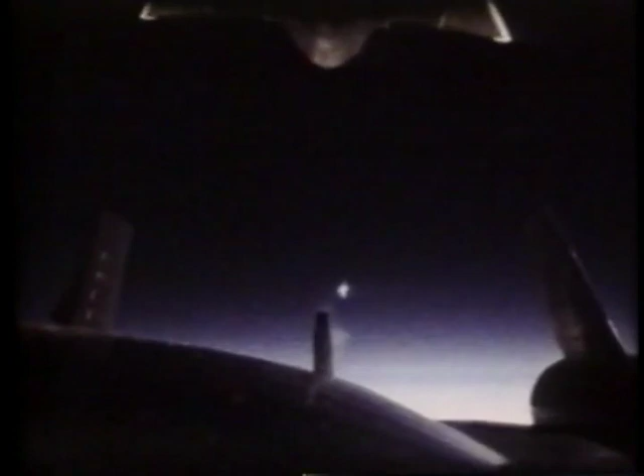While there were several successful tests, it was always a very risky business at best, and Kelly Johnson personally canceled this program after a fatal mid-air collision in 1966. By then, however, he already had two other very successful ox cart progeny off the ground.

The first was the YF-12A, prototype for a proposed high-speed interceptor. It was this aircraft which went on public display when in 1964, President Lyndon Johnson announced the existence of the A-11. It subsequently put on a dazzling show, as in May 1965, it claimed no less than 9 world records, including a top speed of more than 2,000 miles per hour and a sustained altitude of over 80,000 feet, without in any way taxing its full potential.

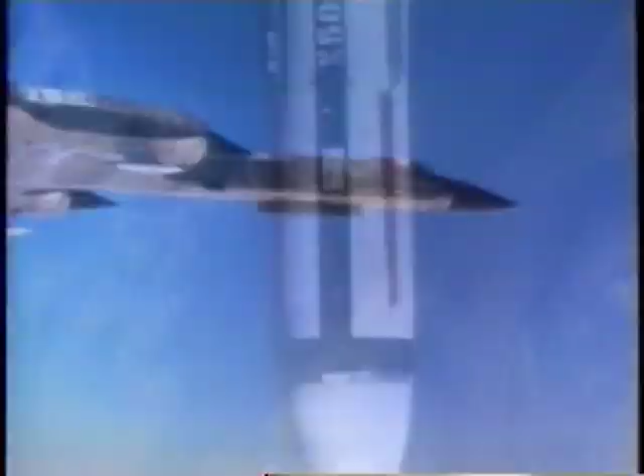The YF-12 was equipped with an advanced ASG-18 Doppler radar system and configured to carry 3 AIM-47 missiles internally. Though missiles had never before been launched within the YF-12's speed and altitude regime, the aircraft and its systems scored a reported 90% kill rate, even against drones flying head-on down on the deck at distances of 120 miles and more. The Air Force was impressed enough to order 93 of the big fighters into production for the Air Defense Command, but budgetary constraints ultimately resulted in their cancellation.

And shortly thereafter, the A-12 was also removed from service, leaving only the Air Force's SR-71, which took over its reconnaissance mission. Though everything about it and its activities would remain cloaked in a heavy shroud of secrecy, this was the aircraft that everyone came to know as the Blackbird.

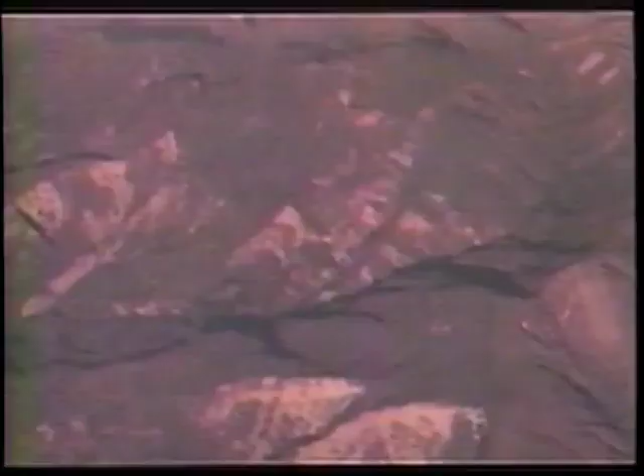The solid coat of black paint, which seemed to add to its allure and mystery, actually had a very practical purpose. It reduced skin temperatures by about 75 degrees. Its clean, elegant lines and the smooth contours of its blended wing-body shape give the impression that an artist had sculpted it into a rare work of art.

In aircraft design, however, more than any other field, form follows function. And here again, every line, every detail of the airplane exists only to serve some practical purpose. The chines, for example, which extend from the wing to the nose and flow gracefully up into the fuselage, actually satisfied a number of requirements.

Aerodynamically, they reduced drag and added lift while also enhancing the stability of the aircraft. The SR-71's mission was long-range reconnaissance, and its fuselage was essentially a big fuel tank. And thus the chines also served to house its sophisticated cameras and sensors. Finally, those sloping contours extending up from the chines enhanced the airplane's survivability by reducing its radar cross-section.

Thus, while an artist might envy its striking beauty, an engineer would only marvel at the logical genius of its design. That genius was recognized when, in 1964, Kelly Johnson became the first person ever to be awarded a second Collier Trophy. The SR-71 went on to claim the world absolute speed and altitude records, and then repeatedly extended them. And to the public, it always remained Kelly Johnson's mysterious, record-breaking Blackbird.

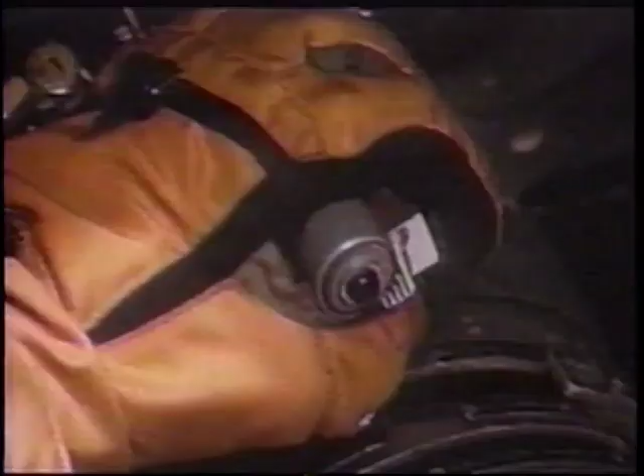The crews who flew it, however, had another name for it. Throughout its long operational career, it remained invincible and incredibly effective. And to its crews, it was Habu, a dark-skinned pit viper with a deadly bite.

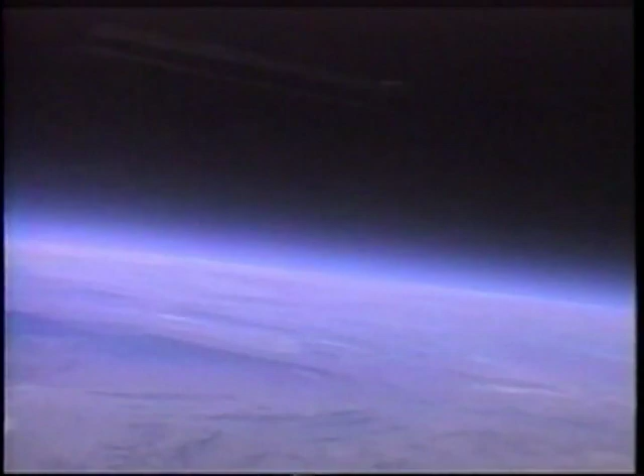And though it was finally retired from Air Force service in 1990, Kelly Johnson's Mach 3 masterpiece is still charting the future, its crews still looking up toward the blue-black void of space, flying exotic research missions for the National Aeronautics and Space Administration.

When he retired in 1975, Kelly Johnson had been on the cutting edge of an advance from 200 to more than 2,000 miles per hour. He'd been involved in the design of 44 different airplanes, many of them among the classics of aviation history.

And at the time, he was still looking very much into the future. He'd gotten the Skunk Works into a project which would bear fruit in the F-117A, the world's first true stealth aircraft. And he'd left a legacy which would leave its mark on the future.

It seems kind of ironic that a lowly creature, known primarily for its odoriferous emanations, had, by the time Kelly retired, become a universal symbol for excellence. What was his secret?

Well, he had a remarkable capacity to take a complex problem, reduce it to its simplest components, and then take the most direct and sensible approach to its solution. Always a maverick, he was smart enough and tough enough not to follow the committee rule of conventional wisdom. This gave him remarkable freedom. With that freedom came a tremendous burden of responsibility.